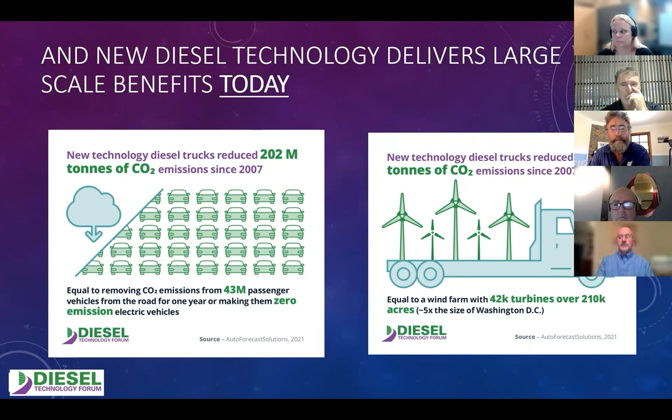So using the most advanced diesel technology does deliver some pretty significant benefits. So let me focus a little bit more on the ag sector. I know that's one that you're particularly interested in. And we've already covered a number of the different aspects of diesel's role in the ag sector, and they're, I think, probably very much aligned between our two countries.

Not only in producing the food stocks and the harvesting and planting of the crops, but transporting of the product, pumping of the water that's needed, and throughout the entire supply chain, diesel has a key role, whether it's moving the grain from the farm elevator to the grain storage facility, to the rail yard, to the inland waterway barge, and so on, and then ultimately to grocery stores around the country. So, the role of diesel in all this is very deeply intertwined.

And the diversity of applications using diesel is quite tremendous. All shapes and sizes, doing all kinds of work. And you're all familiar with many of these, and I'm sure you have some unique ones of your own. But from things that harvest very delicate crops, like tomatoes or strawberries, to some of the row crops and grains, to ensilage, this is the work that diesel does every day.

And so one of the things I like to do is just level set everyone about why we are talking about diesel. Why is it that diesel is the dominant technology that it is today? And it's really for these reasons on this slide, which is this unique combination of features that thus far no other technology has been able to match. We've got a fuel with very high energy density, engines that deliver very high power density from burning that fuel, and they do it quite efficiently.

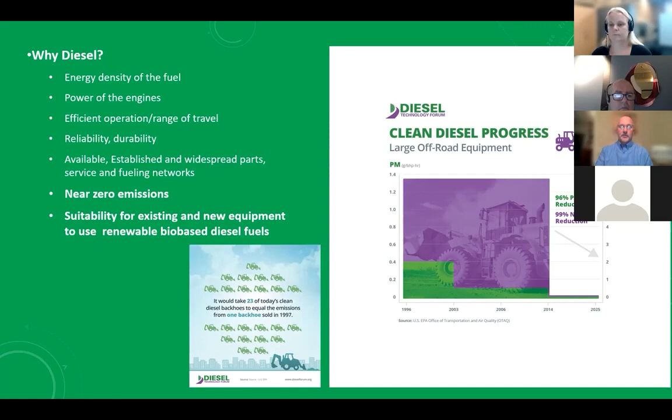Now, turning to that future, though, we all are understanding that some new fuels and technologies are emerging. And in particular for the ag sector, we know that diesel is the prevalent fuel today, but in the future, that's likely to change to some extent. And what are customers requiring in the ag space today? The same things that they've always required, which is I have to have fuel to do my work.

I have to have fuel that's affordable. I have to have a way to run my machines and equipment to do my business, whether it's planting crops or harvesting, whatever it might be. So there's a whole range of requirements customers have and will continue to have in the future.

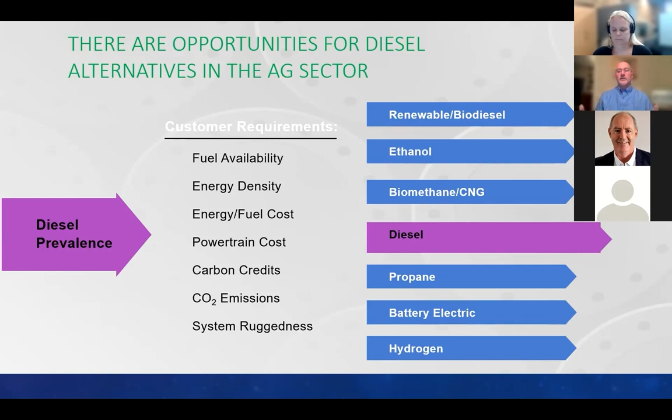But manufacturers and many of our members envision that some of these technologies or tractors and equipment that have relied on diesel in the past will start to see some diversification of fuel in the future. And from top to bottom here, you sort of get the sense of which ones are going to be the biggest players in that space. And the top couple that are getting a lot of traction here in the US are the renewable and biodiesel fuels, ethanol, of course, from the ag sector, biomethane and natural gas and renewable natural gas are emerging much more. And then there's some others that come in maybe more towards the bottom. But diesel, you can see, continues to exist in the future, even alongside of all these other fuels and technologies.

And so that is, how do we make the diesel engine better? And we know how we're doing that in the engine, but what about the fuel? The diesel fuel has not changed in the US since 2006, when ultra-low sulfur diesel was first introduced. So I think there's a tremendous opportunity on the fuel side here that we haven't fully realized yet.

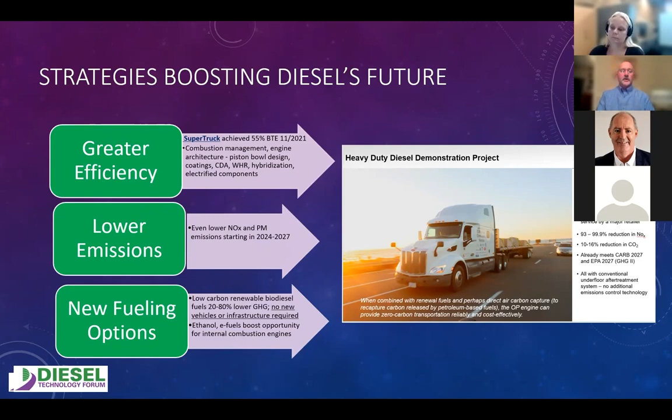And the last two are ones that are more current of interest maybe. One is that the use of biodiesel and renewable diesel is increasingly viewed as an alternative for different users, for fleets, for farmers, for others who might decide that they would prefer a different kind of option other than being pushed towards electric or hydrogen or something that they may not be comfortable with, or frankly is not really available at scale or for what they need. So it is an alternative that they can begin doing something towards decarbonizing their sector.

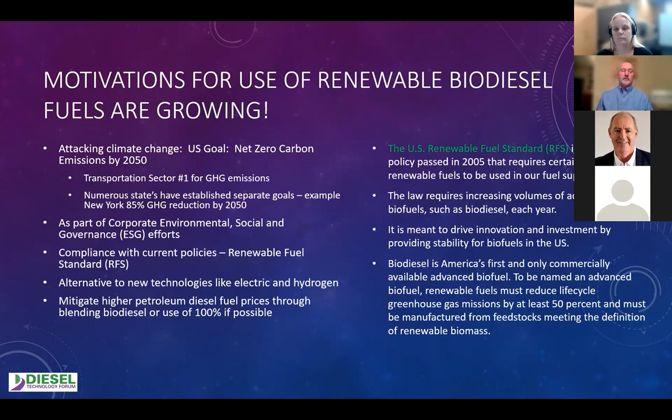The last thing here, and the most recent one in present day, is using more biofuels mitigates the higher diesel fuel prices we're all experiencing because of some of the issues evolving out of the Ukraine, the war with Russia. So part of that is driving up energy prices, and diesel fuel is top of the list there. We're seeing diesel fuel here in the U.S. at over $5 per gallon. It's the highest we've seen on record. So it's got a significant motivating factor there. So one of the solutions to that is to use more renewable fuels if you can. So these are the main motivating factors for getting folks towards renewable fuels.

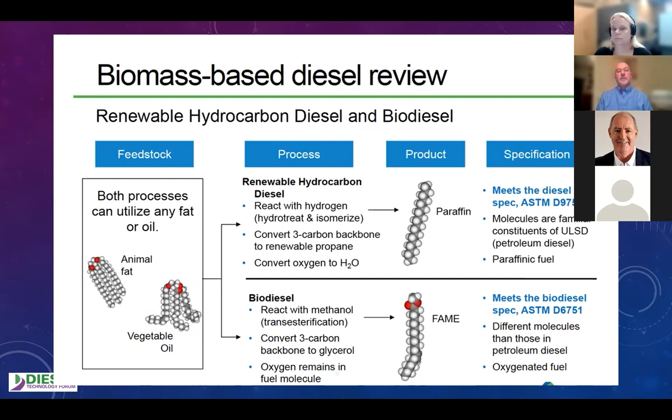The feedstocks, and I'll get into this a little bit more in a minute, but the feedstocks principally are animal fats and vegetable oils. These are the same. The processing is different. And that's where the divergence takes place between what is traditional biodiesel on the bottom, which results in the fatty acid methyl ester, the FAME kind of fuel that we talk about, or the renewable hydrocarbon diesel that is depicted on the top line, which is a non-esterified renewable diesel product. It's a very paraffinic kind of fuel and is what we consider to be a drop-in replacement, if you will, for conventional petroleum diesel in the US.

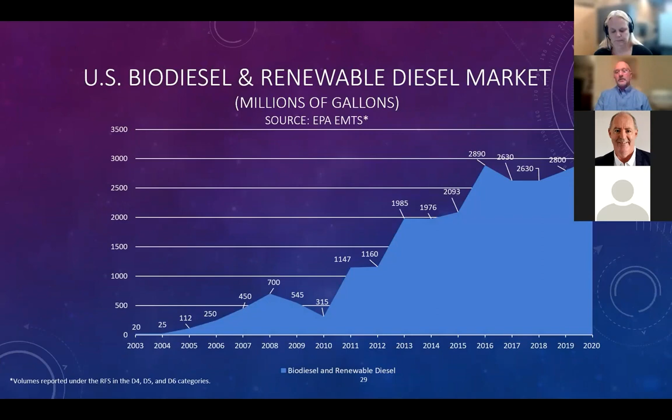And it has grown quite substantially over time. You get the sense that we've had some pretty rapid growth in production of biofuels in the US market in recent years. So the opportunity to produce more seems entirely consistent with where we've been coming from.

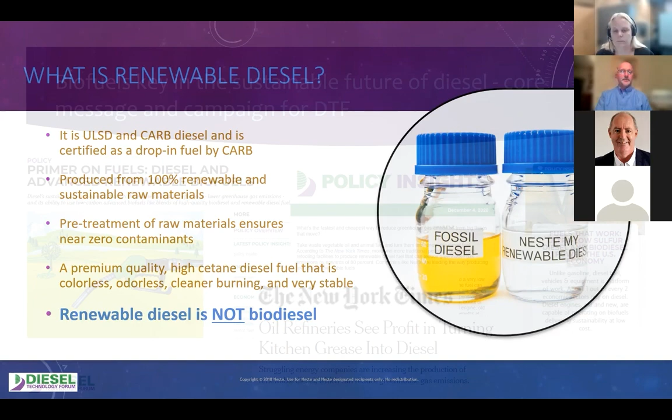And it is not biodiesel. And so just to make that clarification you saw from the previous slide, it offers some advantages over biodiesel in terms of stability and longer term storage and some other properties when burned in some kinds of diesel engines. And one of the things that we like to think about when we see comparisons of carbon reduction, we look at California.

Not exactly the case. In fact, most of the CO2 reduction is coming from biodiesel and renewable diesel fuel, and then ethanol as well. So you get the sense that if we're interested in reducing carbon on a near-term basis, these fuels and technology have tremendous power to do that and are available as well.

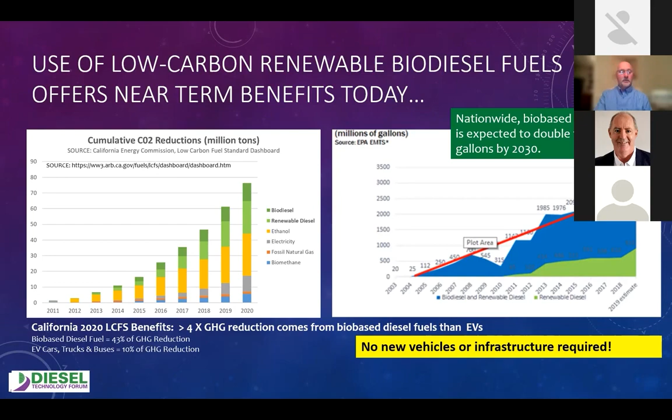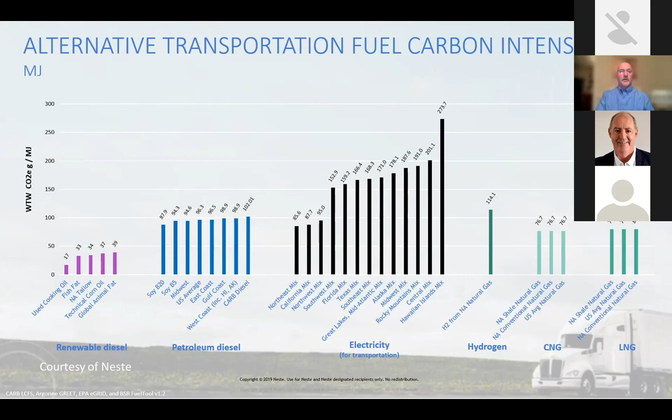One thing that we're trying to talk about a lot more in the US as we see a lot of advancements and pushes for other policies is the time value of carbon. And so that is, what's the value of removing carbon today versus waiting for a full electrified power sector that's got the ability to charge heavy duty trucks, et cetera, 15 or 20 years from now.

The use of renewable fuels can have some immediate impact, and getting more carbon out of the atmosphere now paves the way to continue to achieve some of those more bold objectives that we have for meeting the Paris Climate Accords, et cetera, in the future. So if we really care about removing carbon from the climate today, the way to do that is to use some more of these advanced low carbon renewable fuels.

But I think we have to be realistic that there's a lot of pressure for other kinds of fuels and technologies. We see a lot of interest in compact electric construction equipment, for example, and that seems like a really good application. Same thing for last mile delivery vans in urban areas. Great applications for all electric, limited range, lightweight loads, come back every night. That makes a lot of sense.

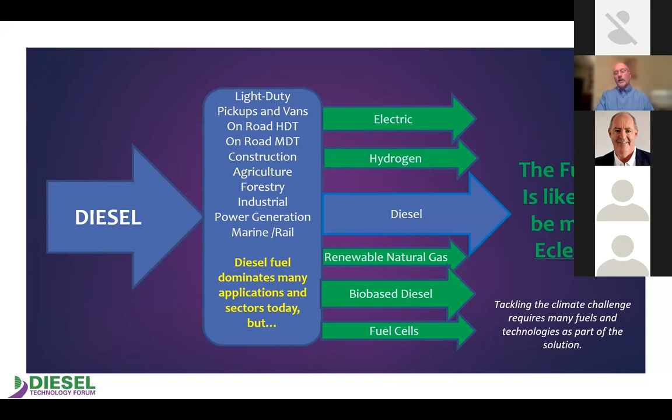If we're talking about long distance, heavy power demands over extended periods of time, will any of these alternative fuels be able to meet or match what diesel can do? It remains to be seen, honestly. So we do think that the future is likely to be more eclectic than electric. And so I think that's okay. We're going to find that these fuels are going to find their way into the right sectors for them.

And so just to kind of wrap up here, diesel is going to continue to play key roles in main sectors of the economy. Changes to the transportation paradigm and clean energy are going to take longer probably and cost more than we project. There's going to be some bumps along the way. And for the users, there's still a lot of aversion to risk out there, particularly right now. So using advanced renewable fuels that take advantage of what they already have makes managing that risk perhaps a lot easier.

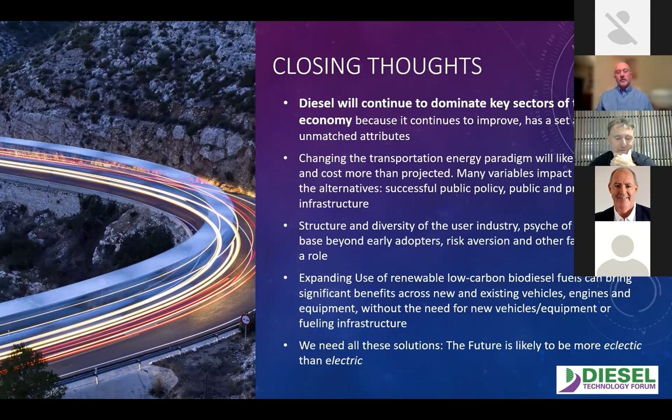And we think that the advantage of renewable biodiesel and renewable diesel fuel is you've got all the equipment that you need that can start using that fuel tomorrow. You don't have to invest in new infrastructure. You don't have to buy a new engine or vehicle or equipment type. So it's really a tremendous advantage there.